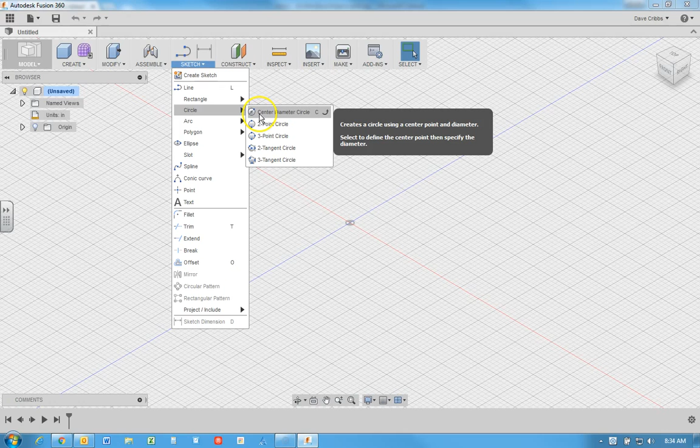Since we're making a wheel, we're going to start with a center diameter circle. It'll tell me to select a plane or planar face I want to draw on. Let's go ahead and select this bottom face. When I left click to select that, it kind of flattens out.

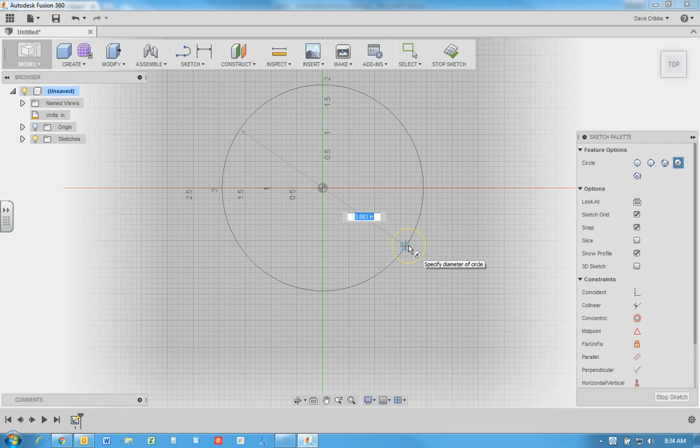And I'm going to draw my circle right here at the origin, not even worrying about what size it is. I'm just going to left click to make my circle, then right click and say OK to be done with the circle command.

The next thing you want to do—right now my dimension is up here, I can go ahead and remove it from the toolbar. So this is probably what yours looks like. If you come down here to where it says sketch dimension, you're going to go ahead and add that to the toolbar, since you're going to use dimension over and over again.

So I want to dimension this circle, so all I have to do is click on the outside of it. Wherever my cursor is, the current dimension will appear. I'll left click—you can either place it on the inside of the circle, but I like to place it out here on the outside, so I'll left click to place it.

The wheels on last year's Rover—we're going to try to put these cardboard wheels on last year's Rover, so we kind of need to match that, are about 28 inches tall.

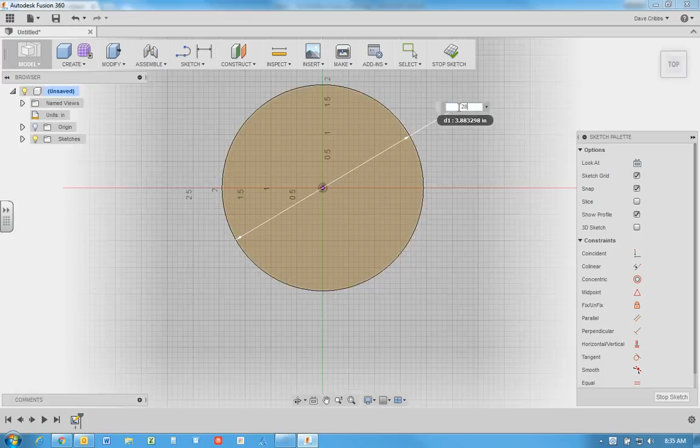So I can go ahead and type in 28 and hit Enter, and it just makes it 28 inches. Obviously it's too big to see, so I can come down here and click the Fit button.

It also really helps to have a 3-button mouse, so you can left click, right click, and center click. The zoom wheel, you can actually click that and make it the right size. So I'm going to right click and hit cancel to get out of the dimension tool. If I hold down the middle button, I can pan my object around so it's centered in my screen.

These are some of the different sketch commands you can use. But this is our circle right here.

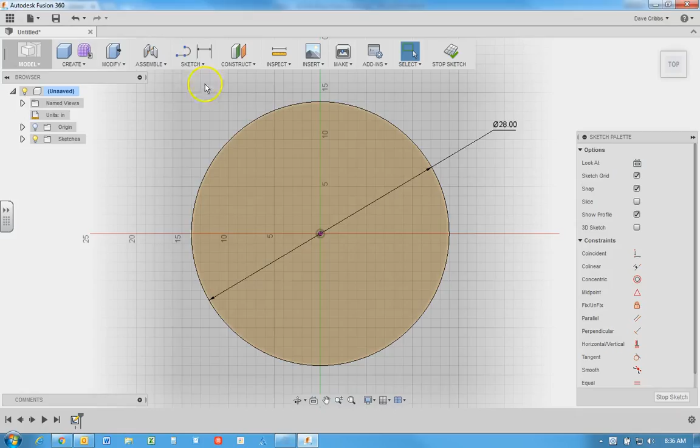We're pretty happy with this. I need to add a hole in the center where the axle is going to go. So I'll come down here and redo the center circle. I'm also going to start this one at the center. I'm not going to worry about the diameter at the moment, I'm just going to open it up. Same thing, right click and hit OK to exit the circle command.

I want to dimension this, and I actually need to go find the dimension first. So let me go ahead.

That's 1.18 inches. So I'm going to go back to Fusion 360, start up my dimension command again, and I know that diameter, and I can see the arrows going all the way across it, so I know it's a diameter, is supposed to be 1.18 inches. So I type that in and hit enter, and it makes it the correct size.

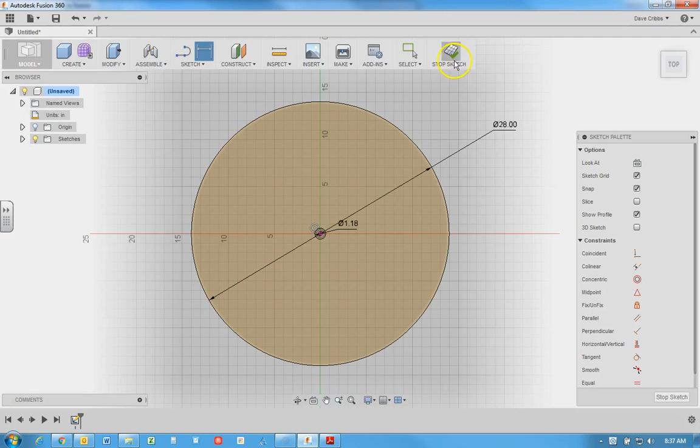And we're going to go ahead and stop this sketch, and now it goes back to our original design panel. I'll click the home view button. This is your view cube. You can kind of rotate and look at the different views up here.

I want to extrude this two-dimensional sketch into a three-dimensional shape. So I'm just going to left click. It selects between these two boundaries. If I wanted to select in here, sometimes it's a little particular about what it likes to select.

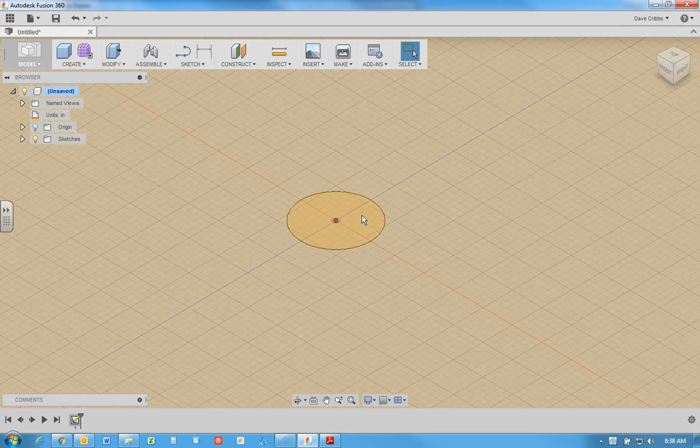Whatever shaded blue is what you're going to eventually extrude. So I want to extrude the outer part, so I can go ahead and right click, hit press pull, which will stretch that two-dimensional shape into a 3D object.

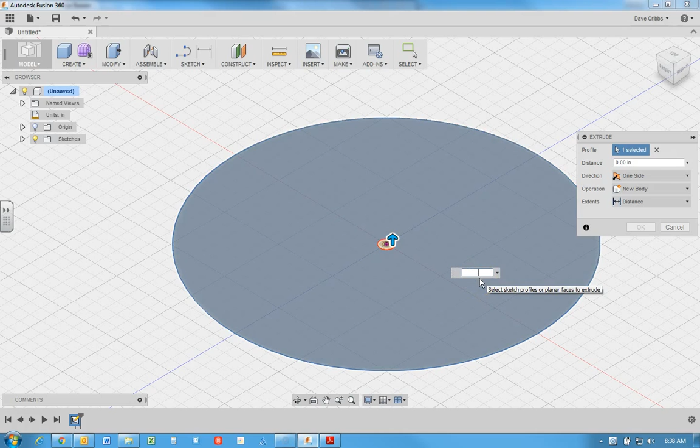I think the cardboard we have is 1/2 inch thick. It's a 3-layer cardboard, so it's kind of thick. So go ahead and hit enter. And now it's taken that two-dimensional sketch and made a 3-dimensional object.

I can come up here to the view cube and look at it from one side. These will rotate the view cube. I can look at it from the top side, or I can go back to my home view. So this is a nice cardboard wheel.

In a later tutorial we can take this and send this flat image to the laser cutter, but we need to have the bolts pass through here for the flange, and then also some bolts to bolt this to the bracket.

So you don't have to do everything in your original sketch. You can kind of layer your sketches. So I'm going to come down here. I'm going to create another circle.

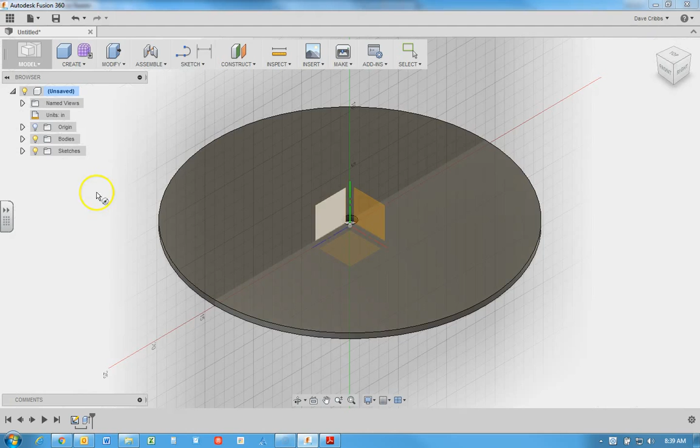And instead of selecting one of these axes, or one of these planes right here, I'm actually just going to select the face of my wheel, this top surface. So you can sketch on one of the planes, or you can just sketch on one of the surfaces.

The cursor will snap to different objects. So right now it's kind of snapped to the origin. And if I just kind of go straight up, it gives you a little line letting you know that it's going vertically above the origin.

So I'm going to create another circle here. Once again, I'm not going to worry about the size. I will correct the size later.

I'm going to hit OK. The circle I'm making now, if I go back to my PDF, these 6 holes are the bolt holes that we actually bolted the flange to the disc hub. This dotted line through the center of all these is called a bolt circle, and it tells you the diameter of that circle. We can see this bolt circle is 1.73 inches in diameter, and these holes are 0.24 inches in diameter.

So we'll go back to Fusion 360. I'm going to drag this to the center a little bit, then grab my dimension tool. I know this circle needs to be 0.24 inches, so I left click to place the dimension and type in 0.24 inches, and it makes it the correct size.

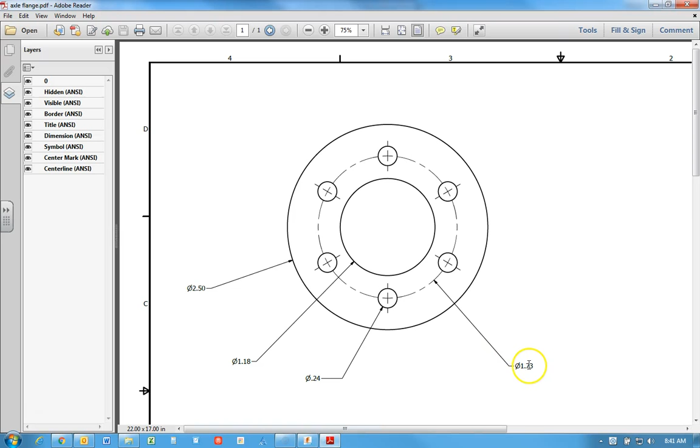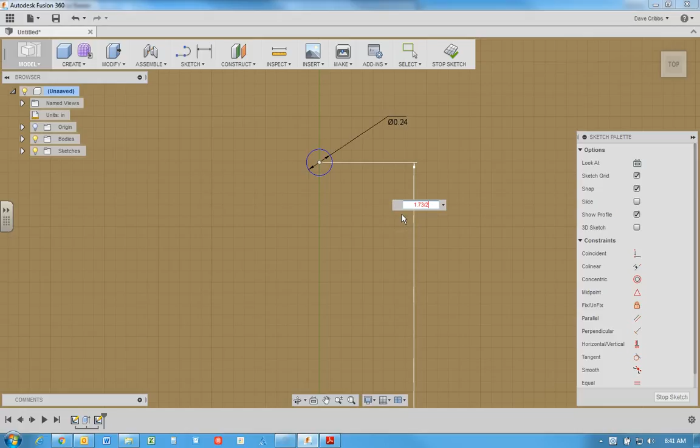I know the diameter of that bolt circle is 1.73. So I'm going to dimension from the center of the wheel to the center of this circle. But it's not going to be 1.73 — since I've marked out the radius, it's 1.73 divided by 2. You can put equations in there and it does the math for me. It moved it out of the way since it's a much smaller distance than before. I'll go to fit so I can see the whole wheel, then zoom in, and now I can see the dimension from center is 0.865, which is half of 1.73.

And then I've got this circle, which is also the right diameter for the bolt. Now I need 6 of these. I could try to find a way to get the right angle manually, but there's a much simpler way. I'll cancel out of the dimension command — you can either do this in sketch mode, or stop the sketch and do it as a feature. I'll just do it in the sketch command.

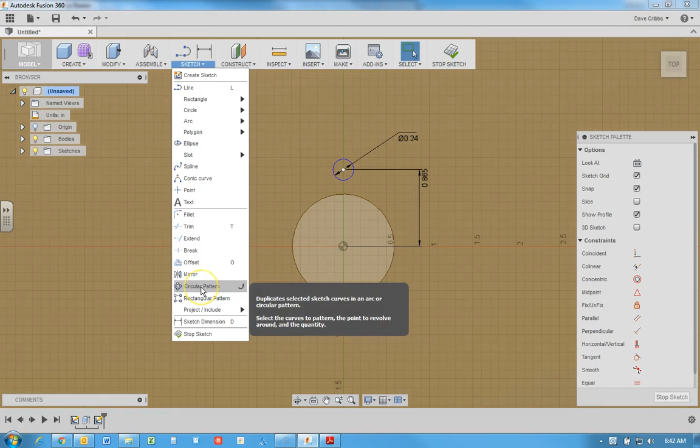So I'm going to create a circular pattern, which will duplicate that one bolt hole several times. I select circular pattern. First it wants me to select an object — I want that circle, and it tells me I've got one selected. Then it wants a center point for that circle, so I click this; it highlights blue to let me know that's what I'm selecting, since I want the center of the circle. It comes up with a full circle.

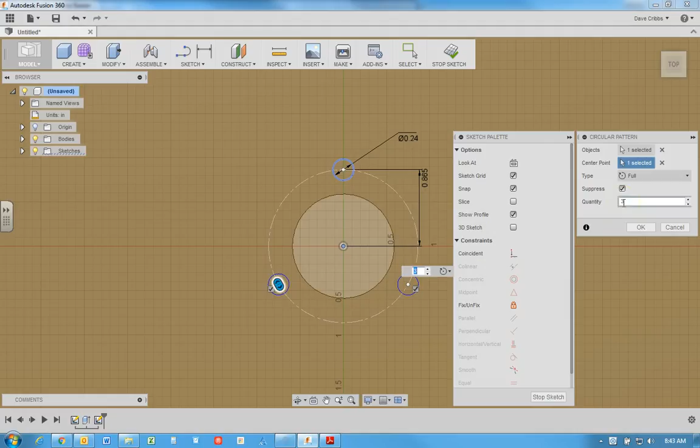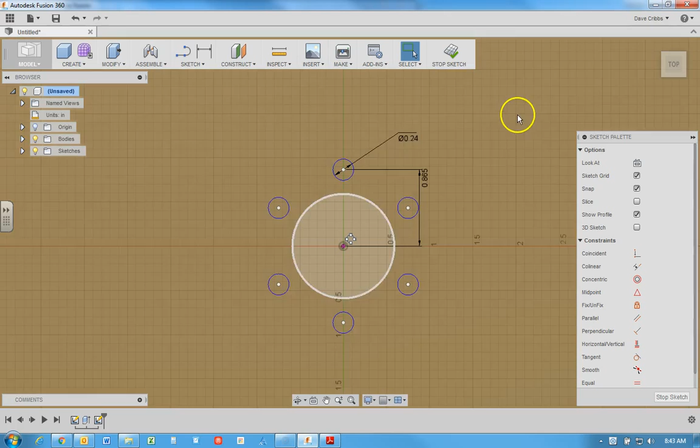You can see there are 3 listed already, and if I hit the up arrow, it goes to 4, 5, and 6 — there were 6 on our original drawing. They're all equally spaced, so I just hit OK. Now I've got 6 of those circles, the same distance from center, same size, all equally spaced. It's really nice, so I'll go ahead and hit Stop Sketch.

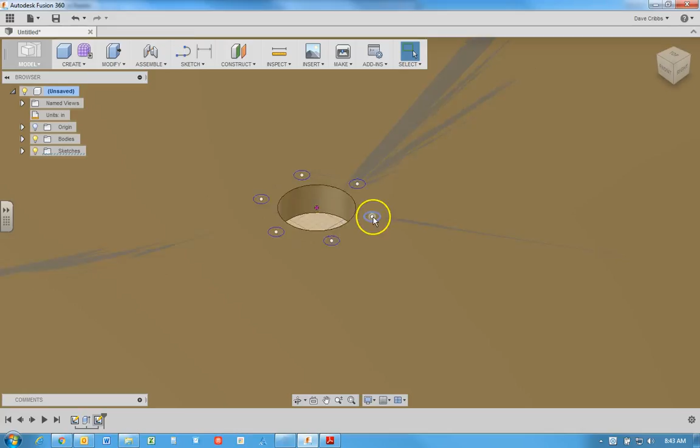I'll hit the home view, and you can see I've got all those circles on the center face of the wheel. So now I'm going to take all of these circles — I actually need to click inside the circle — and hold down the Shift key while I select them. Didn't quite get that one; sometimes it's kind of particular about where you click. Let me zoom in a bit better. You'll see it changes color.

And of course, since I'm doing a tutorial, it's being difficult. Since this is cloud-based, you have to be a little patient with it — you can't just click faster, you've got to be a little slow.

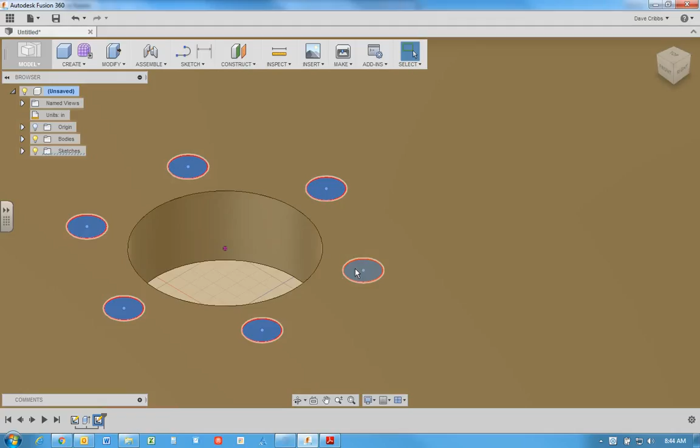Great, so I've got those 6 faces selected. I'm going to hover over one of them and right-click for Press Pull — this is the extrude command. I don't want to extrude these upward, I don't want to create new material, and I don't want to join. I want to go ahead and cut.

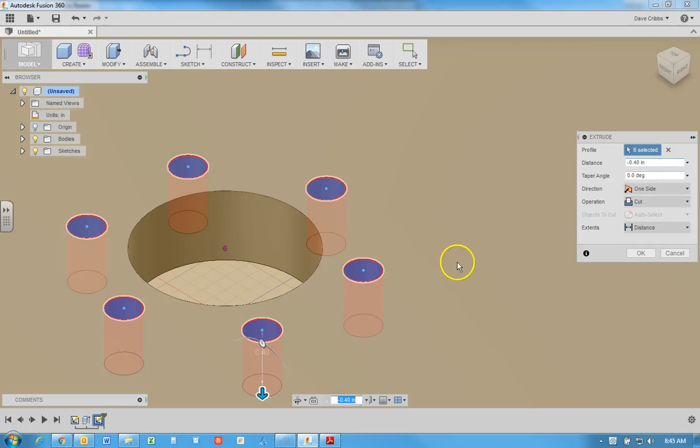So I want to go through the body the opposite way, and I know my distance is 0.4 because that's how thick I made my cardboard. But instead of typing in that same distance, since the cardboard may be the wrong thickness, I'll come over to extent and instead of a specific distance, say cut through all layers. Then it will automatically cut through to the bottom of the material, so if I change the thickness of my material later, it'll change that cut to match. I go ahead and hit OK.

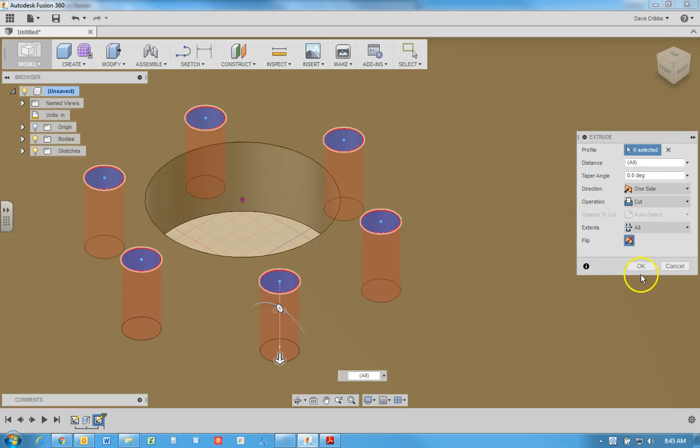And now I've got the 6 holes for the wheel hub.

I'm going to zoom out a little bit. The next thing I need to do is make some holes for our wheel bracket. We don't have a wheel bracket made, but I know I'm going to have to bolt these pieces of cardboard together somehow, bolt them or glue them. So I'll just start a new sketch.

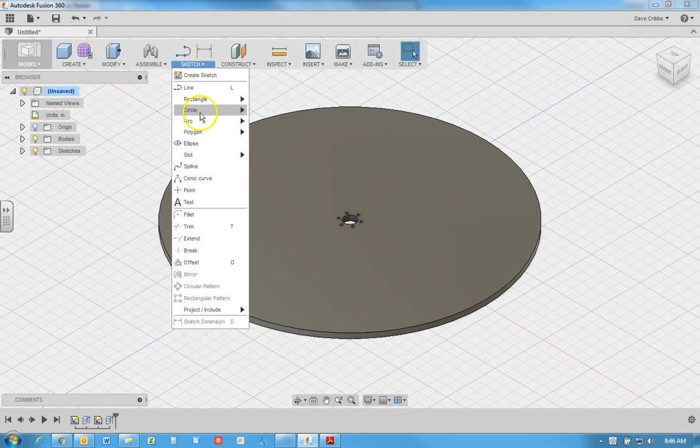Once again, I'm making some more circles. I'm not going to pick either of these planes. I'm going to pick this object right here, the top of my wheel. I'm going to select that.

If this is where the flange is getting bolted, I want the cardboard to be bolted on that same line. You can kind of see it grabbed onto the edge of that circle, and that's not what I want. So I'll just come down here to the center. It grabs onto the center, if I'm lucky.

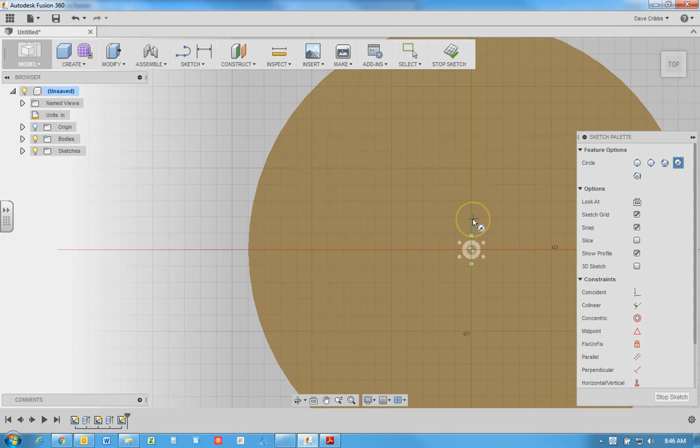Alright, let me zoom in a little bit. Now it's grabbed onto the center, so I'll put my center here, and come out a certain distance.

I really don't even know how big these bolts are going to be that we're going to use, and that's a great thing—I can just come back here and change it. So we'll just guess that we're going to use quarter-inch bolts. That makes it the correct size.

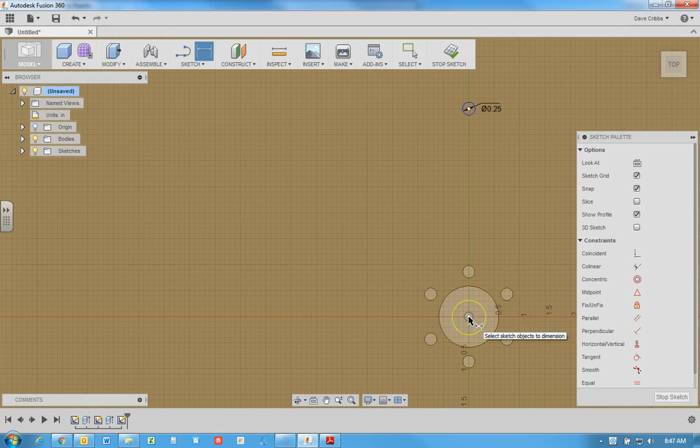And then once again, from the center of our circle to the center of that—I'm not even sure how far I want it, but 4 inches looks nice. So we'll go ahead and hit OK.

If I zoom out, we got a pretty big wheel. So I'm going to make another bolt hole up here. I'm going to need another circle.

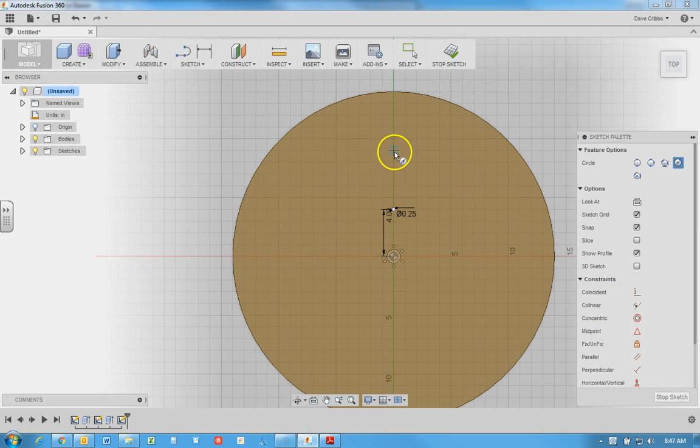You can kind of see it snaps to that green vertical line, so I'll place the center there. I'll come out, and I'm not even going to try to get the correct size because it's so much easier just to click.

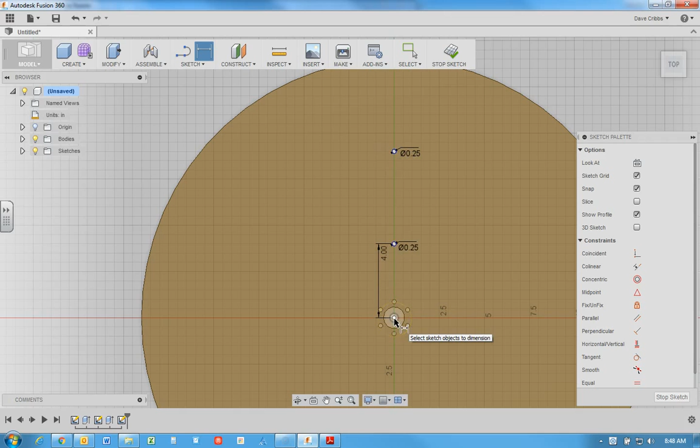I'll place your dimension, and I guess that was a 0.25 bolt that we're putting through there. And then where do I want that hole? It'll snap to the center—I have to zoom in a little bit to make sure I get the center of this circle.

I'll place this dimension. It's at 9 inches, and we'll just change it to 10. And if we don't like it, we can just come back in and change it later.

To change the dimension, I can exit out of the dimension tool. If I just click it and then double click, it opens it back up, and you can edit this value to whatever you want.

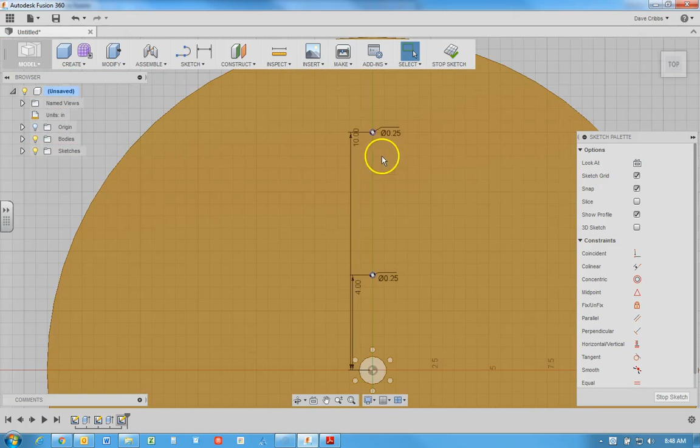Okay, so last time I went ahead and did the circular pattern in the sketch tool. This time I'll do it from the feature tool. So I'm going to stop my sketch and go back.

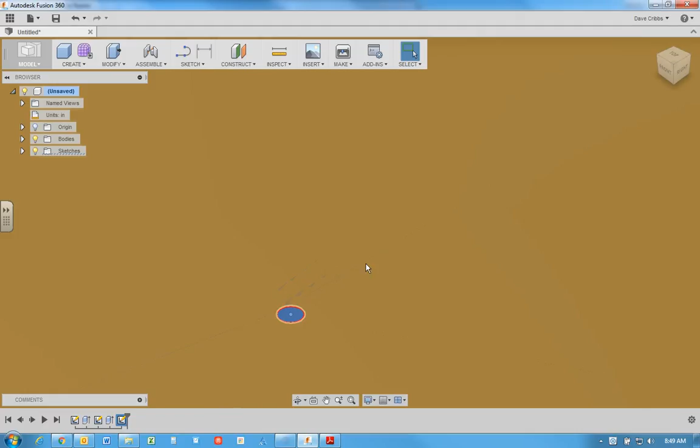To my overall view, and I'm going to take these two circles. I'm going to zoom in, select that one. I'm going to hold down my middle mouse button to kind of pan. Actually, I'm going to zoom out so I can see where I'm going.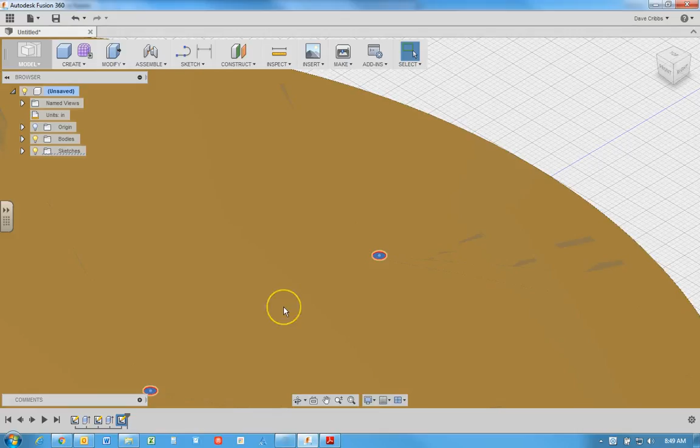So that one circle selected, I'm going to come over here. It'll kind of change to a color. There you go. So I'm going to shift-select both of them. So both of those circles are selected.

I'm going to hover over it, right click and do the press pull. I'm going to go through it. Once again, I know that my dimension is 0.5, but I'm just going to say through all—it's going to adjust it to the correct distance for me. And I'm going to hit OK.

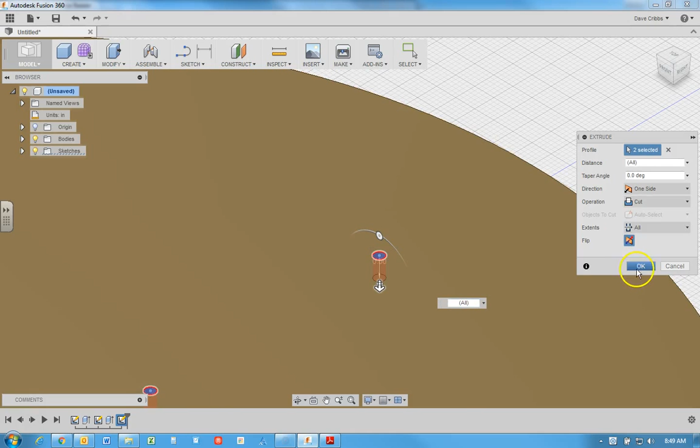So now I've got two holes right here, but we're going to want to put those holes all around. So instead of doing the sketch, I can come over here to create a circular pattern. You can do a pattern either inside the sketch, or you can do it as a feature.

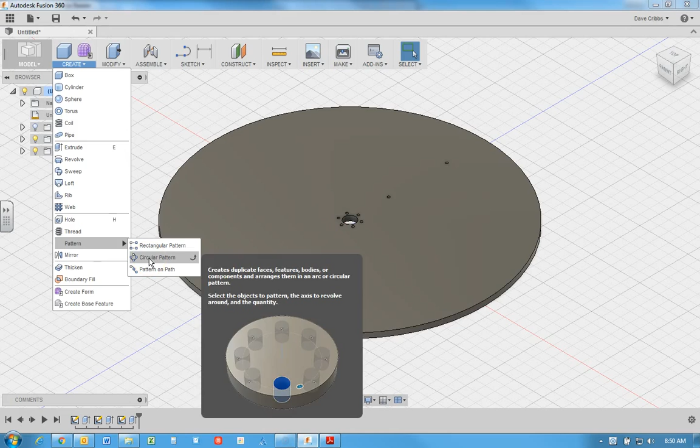So now it asks, what object do I want to use? I want to do a feature, so I'm going to come down to this extrude. Those are the holes I just made, and this is our history bar of the actions I've done.

I made a sketch and extruded it for the wheel. I made a sketch for the center hole and the hubs and extruded that. Then I made a sketch for the bolt holes on the wheel and extruded those.

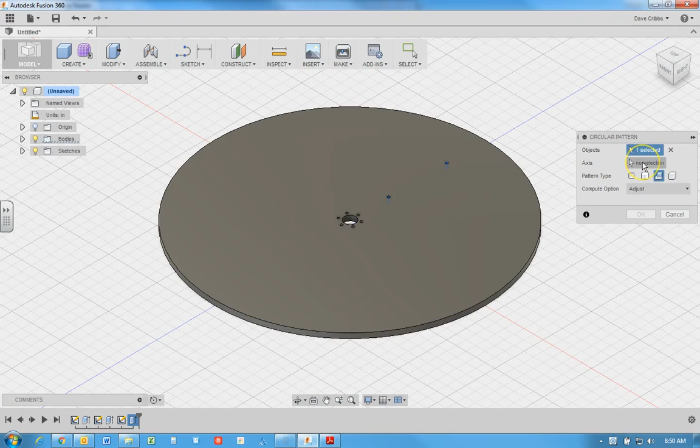So I want to use these two holes, and they highlight in the view in blue. It asks for an axis, so I'll pick this one right here.

Once again it guesses I want 3 of them, but I'm going to go ahead and get 6. Since these two are lined up with this bolt, the rest of them should match as well. So I'll hit OK, and it goes ahead and makes those extra bolt holes.

If I go to the top view, you can see that these are all in the same line moving outward from the axis. So as we're designing, if we see something's wrong, if we need a bigger bolt or need to change something, I can come over here to my sketch.

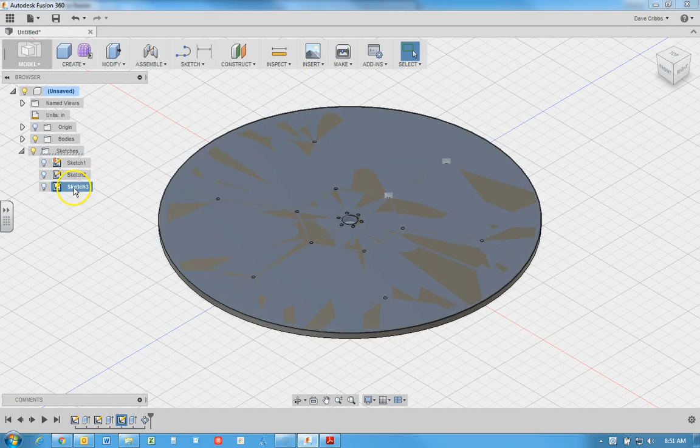I can pick one of these 3 sketches and go back to Edit Sketch. If we decide these are the wrong places, I can grab this forward and move it over here so it's easier to see.

Double click this, I'll change it to 5 and hit Enter. Double click this one, change it to 12 and hit Enter.

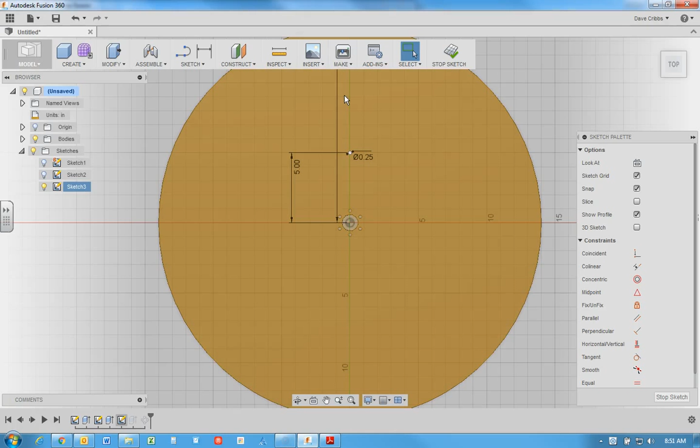We'll change this bolt to 0.375, and change this one to 0.375 as well. Even though I'm just changing these 2, when I hit Enter, whenever I go back and hit Stop Sketch, it'll update all the geometry.

All of these bolts are now bigger, and they're all moved out to the farther side. You can see these were the 0.25 bolts, and now these are the 0.375.

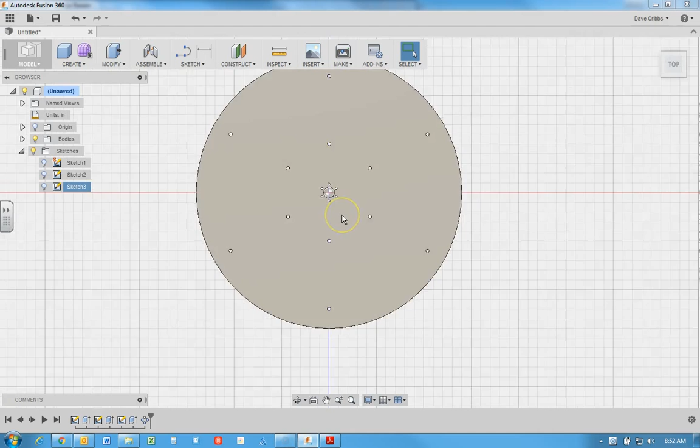If we wanted to change the size of the wheel, I could come back to this sketch, edit the sketch, and instead of this being a 28-inch wheel, if we need to change it to 29, I can hit Enter, and everything updates automatically.

That's the great thing about Fusion 360 and CAD in general - once you've got your part modeled, you can go back to any of your sketches, change those dimensions, and adjust as needed. So if I made a mistake somewhere, I can just go back and change it.

One of the things I want to do is, right now this is a body. So I'm going to open up the body folder and click body 1. It's going to highlight as blue. I'm going to right click and create components from body.

That's going to turn that body into a component. There's a lot more things we can do with components than we can do with bodies. So once you have your general shape made, you can convert it to a component.

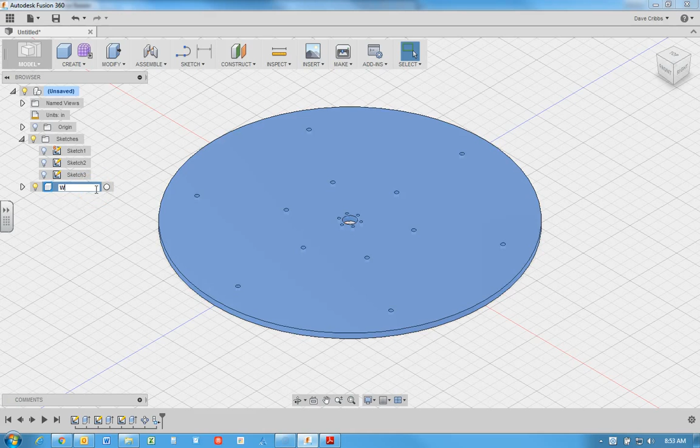Now I can still go back here and sketch something on here and change it, but we want to make sure this is a component. I'm going to come in here, double click, and just call this wheel, so that this is a wheel. You can have other parts in here.

Next thing I'm going to do is come here to save. This is in my folders, and you'll be working in your own folders. You can call it whatever you want - wheel cribbs, and I can't remember how many wheels I've made, but we'll call this tutorial 1. I'm going to go ahead and save this.

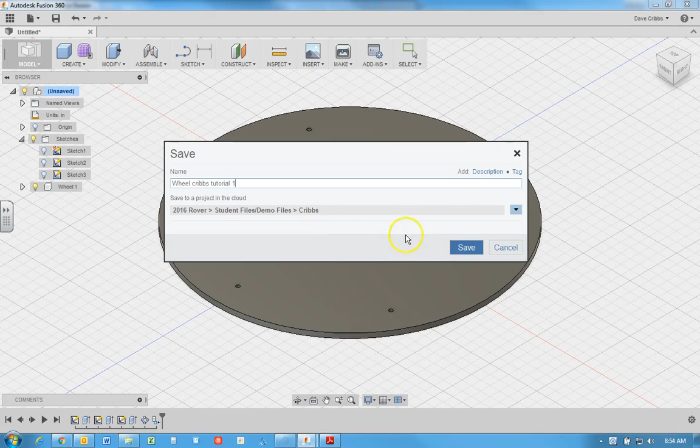And up here now it's got a name for it. It's got V1.

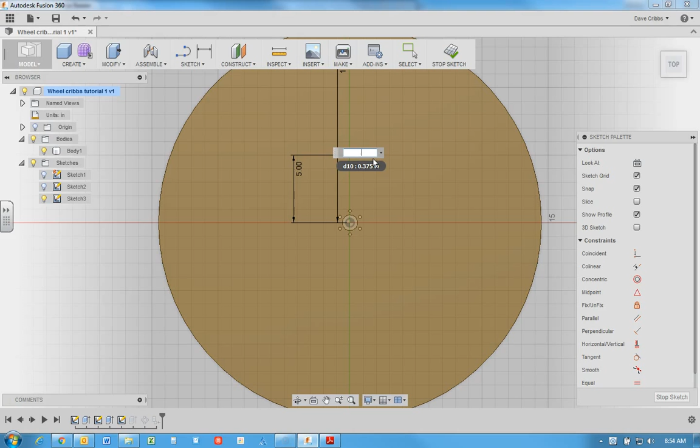If I come back to, let's say my sketch 3, and I edit that sketch, and I change these back to 0.25, double click here, back to 0.25, and hit Enter.

So I made those bolts back to 1/4 inch. All you have to do is hit save, leave this as user saved, and hit OK. And that goes back to V1.

So you've created your first part, and we'll go ahead and stop this tutorial here.